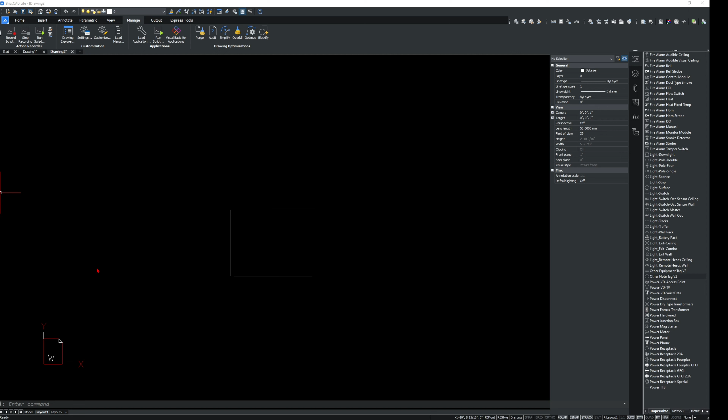Today I'm going to show you how to make a title block from scratch in BricsCAD. It's important to note that this is a very basic operation and you can do this in AutoCAD. We're just starting fresh here, new file.

We're going to go to model space. The first decision you need to make is paper size. Title block needs to fit into the paper you're printing it on. There's probably more paper sizes than you're even aware of, but for me, the most common is Arch D, which is 24 by 36. So let's just make a rectangle here.

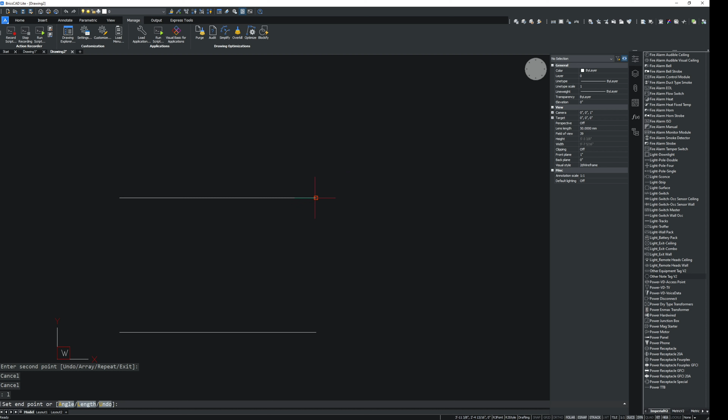There you have it, that is the paper size of Arch D. Now it's important to recognize that you're not filling the entire paper. The printer doesn't go to the edges when you print, so you want to have a margin.

Now the key here is that there is no standard margin. No one's going to tell you what's a good margin, and because every printer is a little bit different, you want to pick something safe, and I'll leave it up to you to figure that out. Personally I use 3/4 inch, which looks like this.

So the area in here is where you would build the title block.

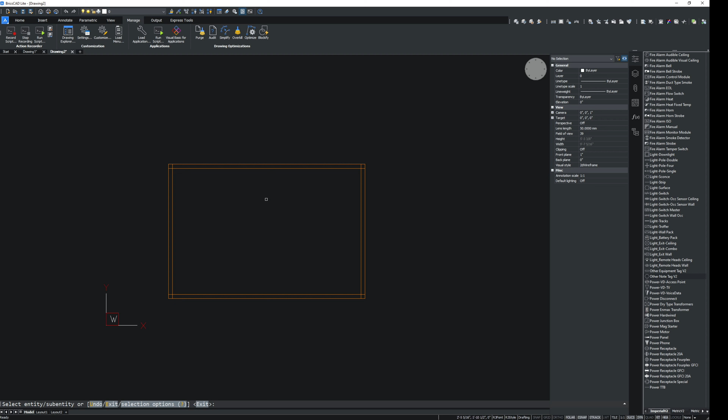Something worth considering is that when you have a set of drawings, they take it on the left side here and they staple it. That means it's a little tighter than it is on the right side or the top or bottom. So you might want to make the margin a little bigger on this side. Your call, but it's useful to think about that, especially when you're laying out things in your title block, so you don't get it nice and snug up to the left side.

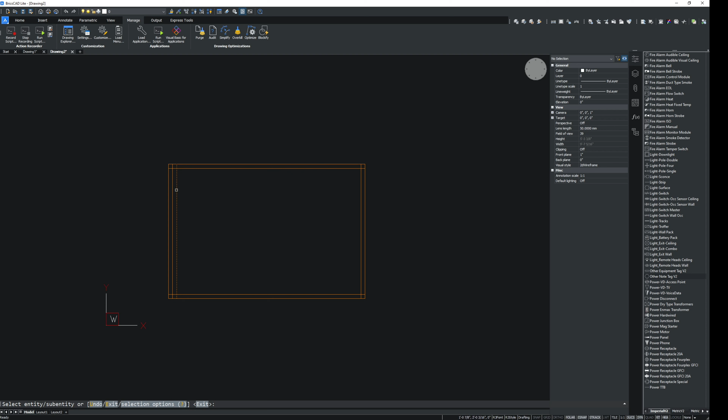So essentially we're working in this area. This will be the title block frame. Your next decision is, do you want to do something on the bottom, which is a very common shape I see, or do you want to do something on the right side?

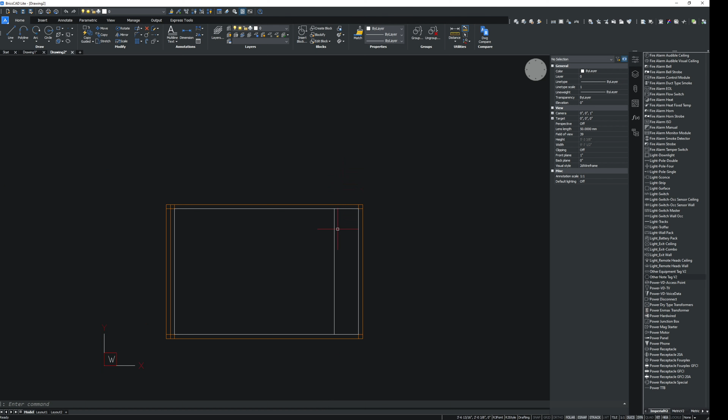I find that this is really dictated by your industry. For me, no one seems to really care either way, but the right side tends to be 95% in my industry, and so that's basically what it looks like. And you just sort of break it out.

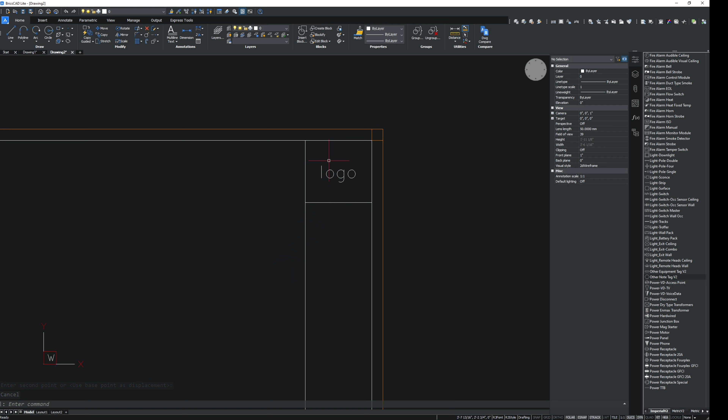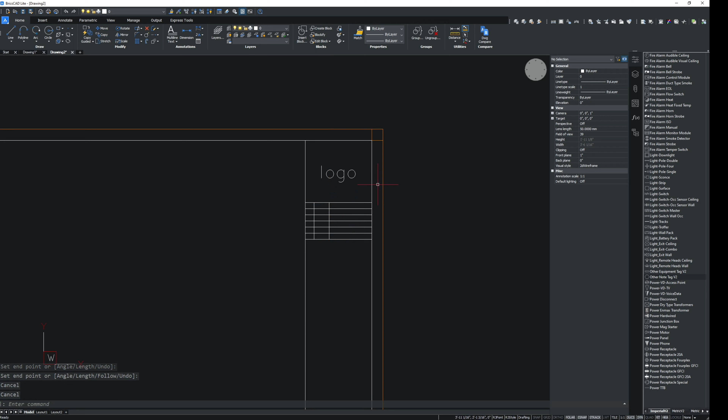You have your logo here, very simple. Your address, phone number, things of that nature. You also want to have your issue. So every time you do a new release of your drawings, you want to update this.

Building permit, construction, as built. It's also very common to have a seal, which is if you're an engineer or an architect, interior designer, you will provide a stamp. Some things you'll want.

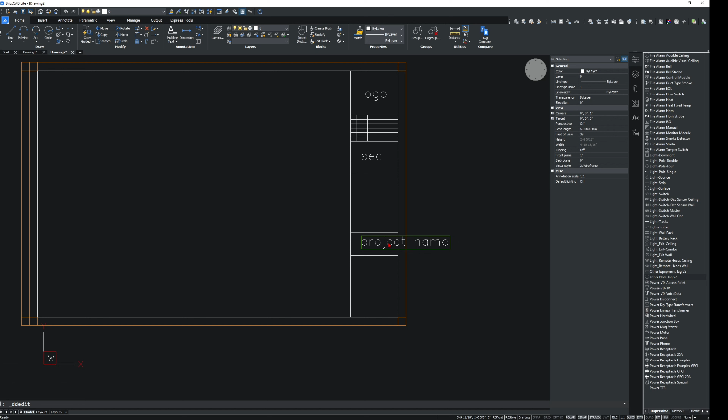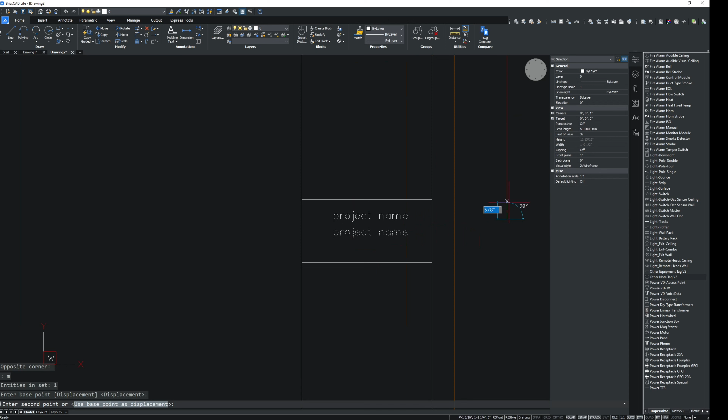So you'll have project name. Just turn annotative off here. Let's go... 1/4. And I'm just sort of filling this in. You will want to format this, pick your fonts properly, but it sort of gives you an idea of how you want to fill this out.

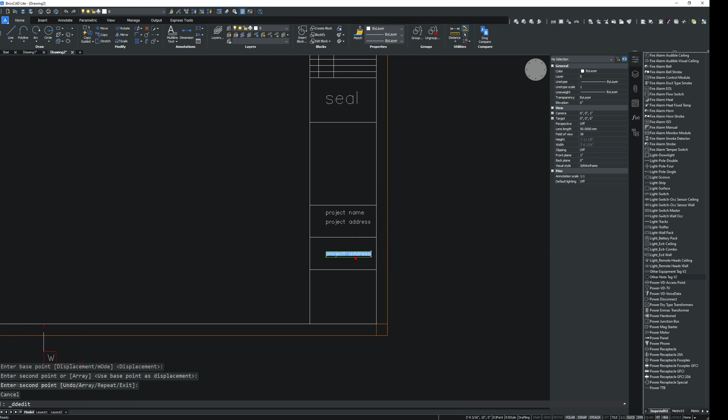Project name, project address. You'll also have page title. And something else you're going to need, industry standard right here.

Doesn't matter if you're doing the title block on the bottom or on the right side. Bottom right corner is page number. Again, format it to look nice.

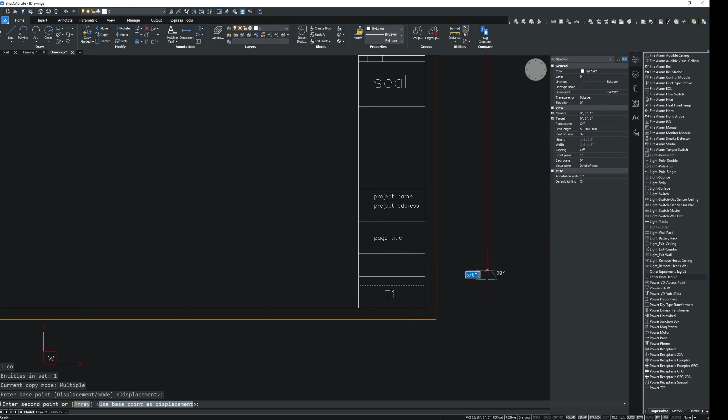But you can add in other little details. It's your call how busy you want to make this. Now there's some neat little things you can do. This is just standard text, but you can convert it to mText.

And in mText, they have something called fields. In AutoCAD, they might call it attributes, I'm not 100% sure. But the point is, you can have something that is dynamic to the actual drawing itself. So an example, you can go down into plot, and it has plot date.

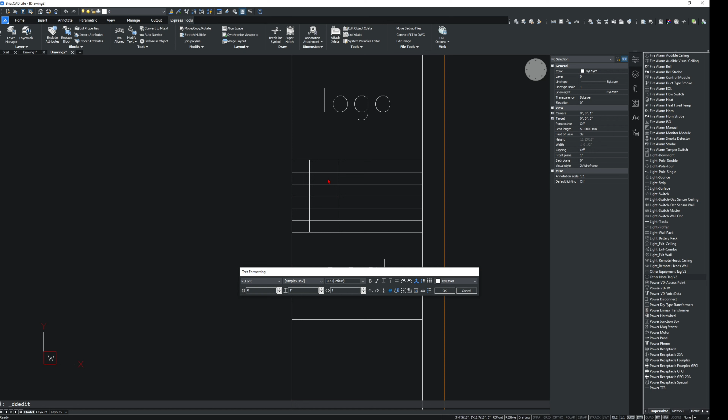Very, very useful. I like it to print with the title block when I printed this. It's just a little detail you don't want to be absent from your drawings. Because even though you'll have your issue up here with the date, it's just good to have it. Your call if you want to keep it, but that's something you can do.

Let's just set it up here really quickly. Attribute, plot date, and we'll just get rid of the hours and seconds because that doesn't matter. And you can just, what is this? This is a quarter, so we'll go 1/8. We'll name this plot date. You can just sort of put it in the title block, push this over, and then well, we'll go print.

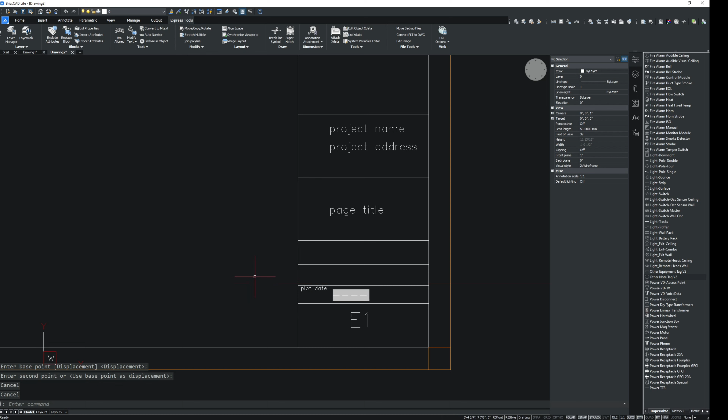So the key here is you want to make sure you select the right paper size. But as you can see, look, your plot date, March 3rd, 2023. Very simple. But there's other little things you can do, there's a lot of fields to explore.

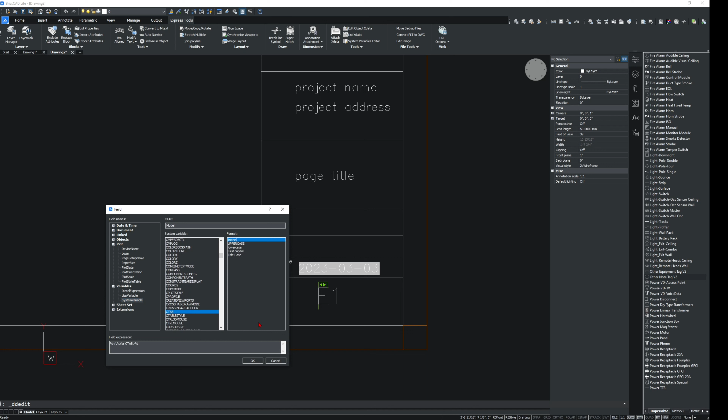A nice one I like is system variables, and they have one called CTab, you can do uppercase. Now CTab is basically these tabs: model, layout, layout 1, layout 2.

For me, I will name my tabs drawing name, or the drawing number, sorry. So it'll automatically fill when you print it.